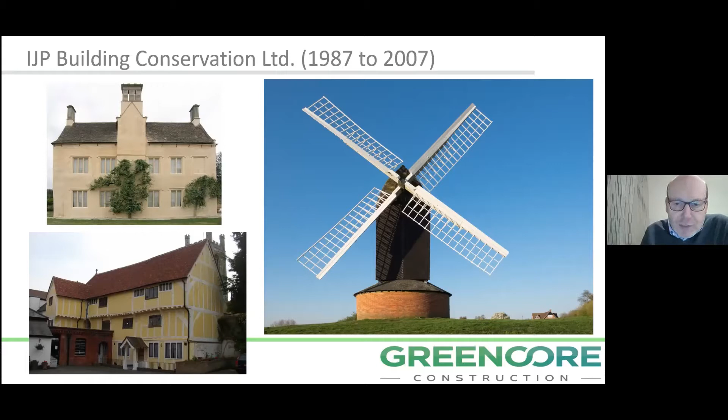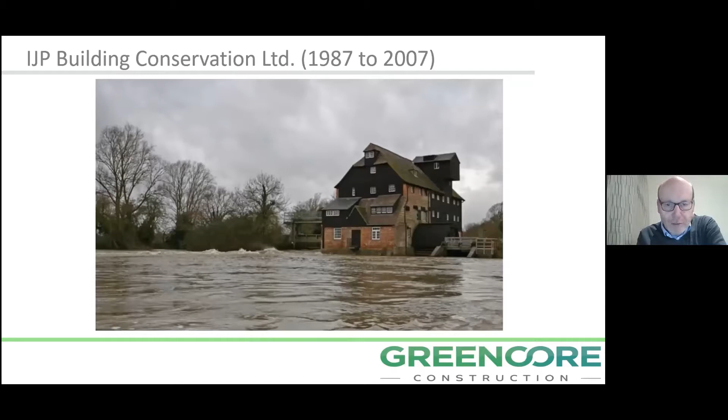And so working on windmills and water mills and having to study the weather, it became very obvious that we were seeing more and more extreme weather happening more frequently. And it's actually, as you probably know, quite subtle, because the differences in freak events are not that great. There's always been something similar in the past, but it's the frequency with which we're beginning to see these freak events happening, and also the fact that we're breaking records on a more and more frequent basis now. So by the early 2000s, I was beginning to think about climate change and the impact that building particularly was having on the climate.

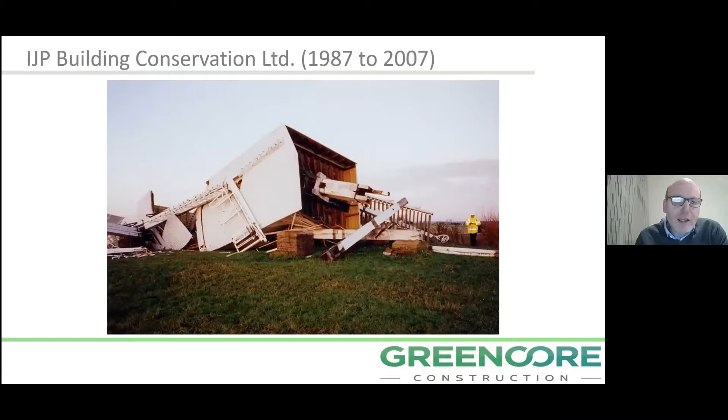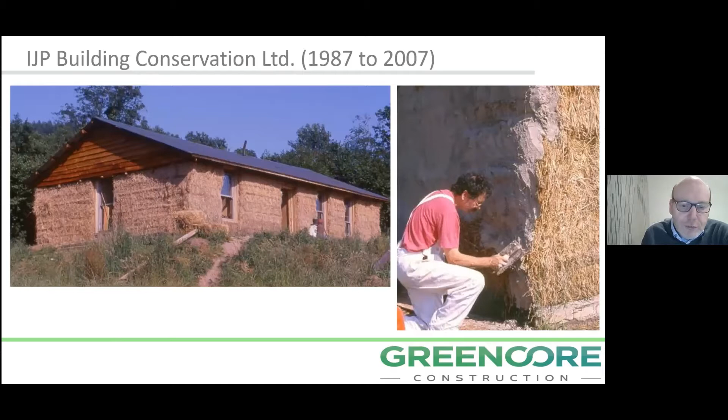But also this was one of my early introductions to using natural materials and getting immersed in eco buildings. And seeing that and the climate change that we were experiencing working on mills led me to believe that some of the things that we used in the historic building sector had a role in new buildings. And so, first of all, we set up a company called Lime Technology in 2002, which was to bring lime mortars, plasters and renders into the new build sector.

And the reason for doing that is mainly that lime mortar is strong enough to stick bricks together, but it's weak enough that you can get the bricks apart at the end of the building's life. So if you build with cement mortar, really that brick only has one life, and that can be as short as 30 years in a modern building.

Whereas if you build with lime mortar, you can get the bricks apart and you can use those bricks again and again, and a brick might have a life of a few thousand years. It could be used many times. And so we developed a way of using lime mortar ready mixed in silos for large scale projects.

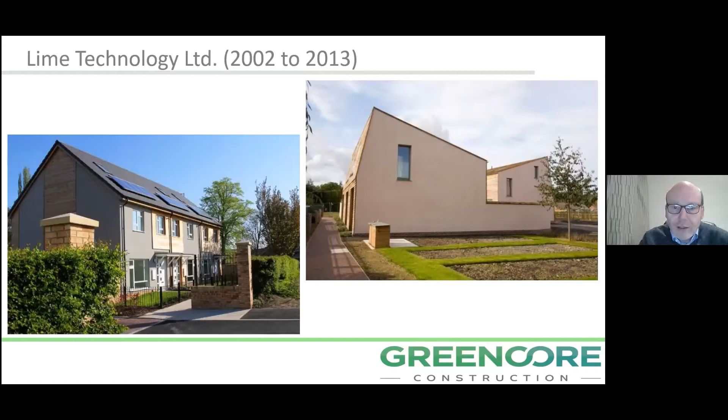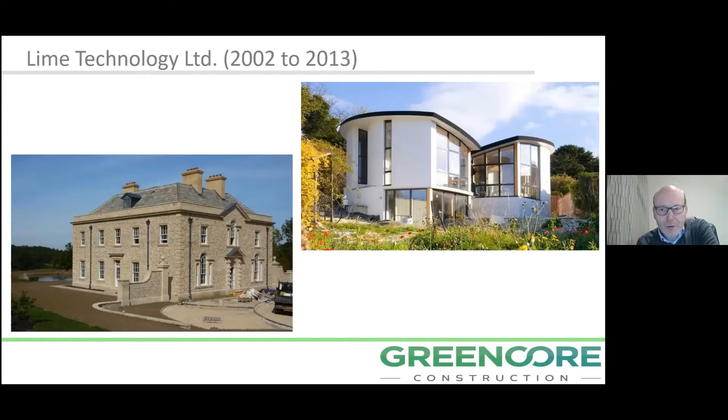And over a period of time, we built quite a few hundred houses of various different shapes and sizes, and we were really involved in supplying the materials and the technical support to people. Some of these houses were very traditional looking, some of them were very modern looking. And we also did quite a few non-domestic buildings.

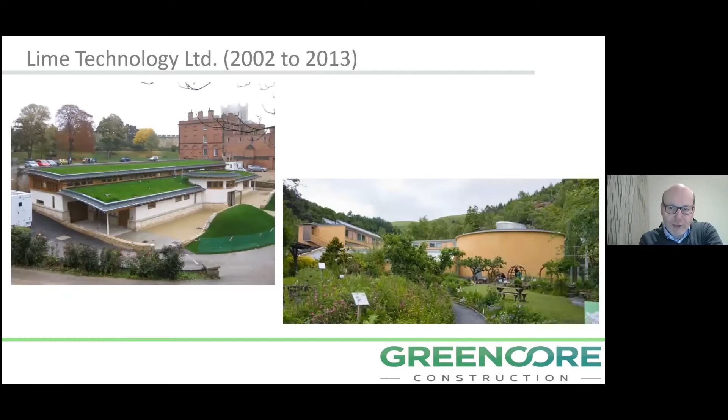The one on the left here is the Heritage Skills Centre at Lincoln Castle, and the one on the right is at the Centre for Alternative Technology in Machynlleth, and it's the WISE building, which is the Wales Institute of Sustainable Education. So it's a sort of mini university complex.

And then in 2013, I left Lime Technology to set up Greencore Construction, and that really meant we had the opportunity to start to not just supply materials and technical guidance, but to actually get involved in building whole houses and building whole developments from scratch.

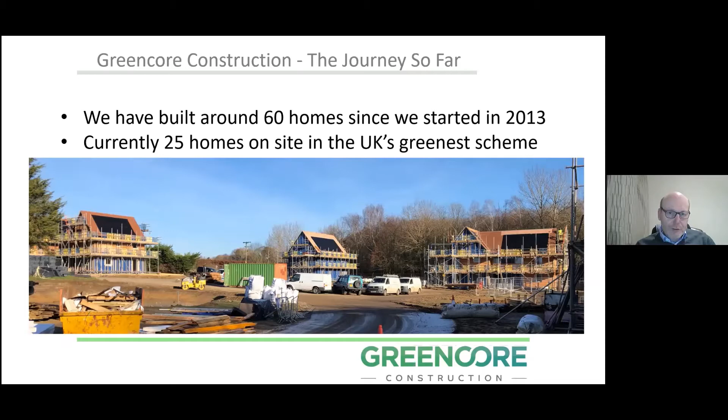And so since we set up Greencore, we've built about 60 houses, and some of you will have seen the project at Springfield Meadows, which is 25 houses, which we think at the moment is the greenest residential scheme in the country, although we'd like other people to exceed it and prove us wrong relatively soon. And all of this really links back to the fact that we're looking for ways that we can help reduce the carbon impact of building, and therefore mitigate the worst effects of climate change.

So the Paris COP conference agreed this target of keeping maximum temperature rise below 2 degrees and preferably 1.5 degrees. And we know that the IPCC reports tell us that if we're going to stand a chance of keeping within the 1.5 degree rise, we've got to be halving our CO2 emissions by 2030. And we're already at about a 1 degree rise, and we're beginning to see the consequences in more and more of those extreme weather events I was talking about.

We've seen temperatures increasing. The hottest day recorded in England, only a couple of weeks ago we saw the hottest New Year's Eve and the hottest New Year's Day on record, didn't we? We've seen wildfires in Australia and the west coast of America. We've seen flash floods all over the world.

And really, I think all of this is summed up by this great quote from David Attenborough that what we do in the next 10 years will profoundly impact the next few thousand. So we've got to be at least halving our CO2 emissions in the next 10 years. And if we don't, it will have a profound impact on what happens for the next few thousand years.

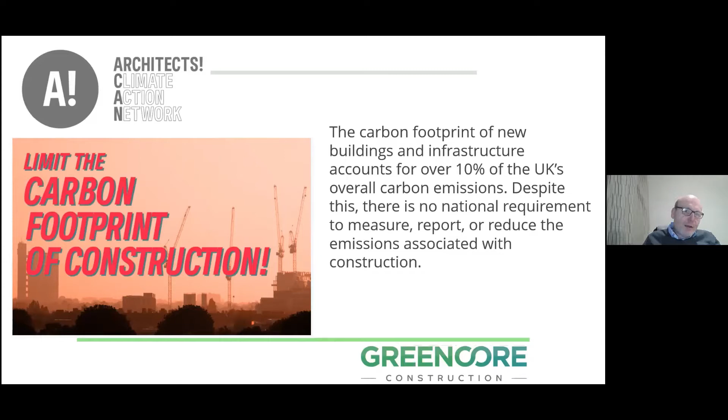Now, we think that the elephant in the room is this thing called embodied carbon, which I'll explain as we go along. Embodied carbon, according to the Architects Climate Action Network, is responsible for about 10% of all the UK's CO2 emissions. That's the carbon footprint that comes from manufacturing all of the construction materials, transporting them, and assembling them on site into buildings and infrastructure. So 10% of the UK's CO2 emissions come from embodied carbon. And despite this, there's no national requirement to measure it, report it, or reduce it. So this all goes below the radar, which is why I refer to it as the elephant in the room.

If we think about it in terms of an average new house, I'm talking about a house that is 100 square meters of gross internal area. The reason I've picked that figure is it's a nice round figure, and it is pretty close to the UK average house size. So all of the emissions from the production, transport and assembly of materials on site to build a house, the average new house is responsible for somewhere in the region of 50 to 60 tons of CO2 or CO2 equivalent emissions at the construction stage. And that's what's known as its carbon footprint.

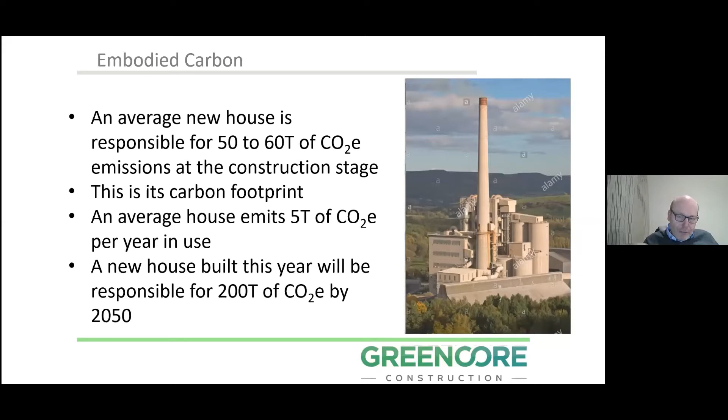And then an average new house in use with an average family in it will emit about 5 tons of CO2 a year. So that means a new house that we build today, by the time we get to 2050, will have emitted about 200 tons of CO2. So in an environment where we're heading to zero carbon for 2050, it seems wrong to me that we've still got houses being built that are contributing to the problem. We need houses that at worst are not contributing to the problem, and at best are actually helping to reduce that problem. So this 200 ton figure per house, just bear that in mind.

Embodied carbon is one of those things that is not really well measured or reported, as we said. So different people that are reporting on it have wildly different figures. If you go to Taylor Wimpey's 2020 sustainability review, they don't actually measure the embodied carbon. What they do report on is this line here, which is emissions per 100 square meter completed house based on scope 1, 2 and 3 emissions, which, although not absolutely identical to embodied carbon, is incredibly similar. And they come up with a figure down in this bottom corner of 209.8 tons. That's purely at the construction stage.

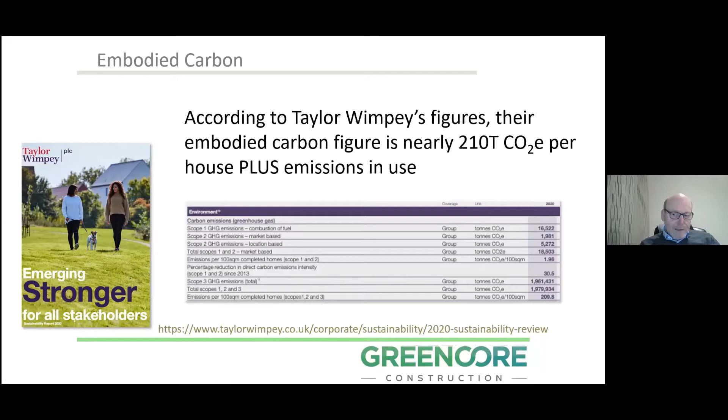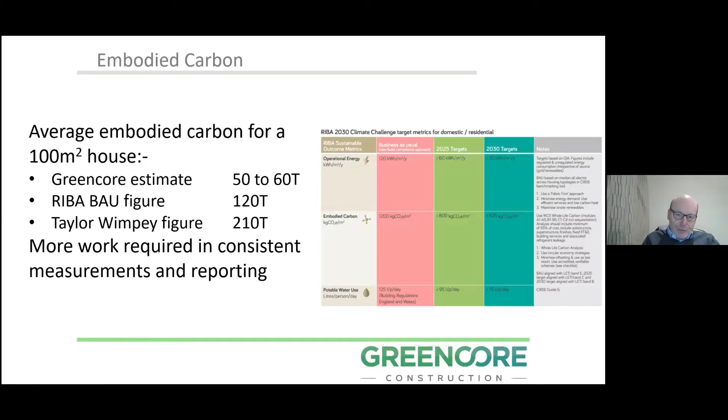So Taylor Wimpey's figures appear to be much higher than the average figures I've reported on. If you go to this table here, which is from the RIBA 2030 Climate Challenge targets, they talk about embodied carbon in the business as usual category of being 1,200 kilos per square meter. So you've got some wildly different figures. According to industry estimates that we use, it's 50 to 60 tons per average house. The RIBA business as usual figures are 120 tons, and Taylor Wimpey's figure is 210 tons. So we clearly need a lot more work in consistent measurement and reporting against embodied carbon, because it's so important.

Back to David Attenborough's quote, what we do in the next 10 years will profoundly impact the next few thousand. Well, there are pretty close to 100,000 new houses planned for Oxfordshire in the next 10 years. And if the figures that I was talking about of 200 tons per house in construction and operation over the next 30 years are correct, we will squander 80% of Oxfordshire's carbon budget just on building unsustainable houses. And worse than that, those houses will probably need to be upgraded in the relatively near future. If Taylor Wimpey's figures are right, then we will actually use 100% of Oxfordshire's carbon budget by about 2029. And remember, that budget isn't just for construction, that's for all sectors, industry, agriculture, transport, and everything as well. So clearly we have got a big problem. We cannot carry on as business as usual.

We also have a problem with the way people think about zero carbon. When most people are talking about zero carbon, things like building regulations, politicians, what they're referring to is the operational emissions, the emissions that come from the heating, the hot water, the lighting, and the way people live in houses. They're not talking about the embodied carbon. And we really need to tackle both of these things, the embodied carbon as well as the operational emissions.

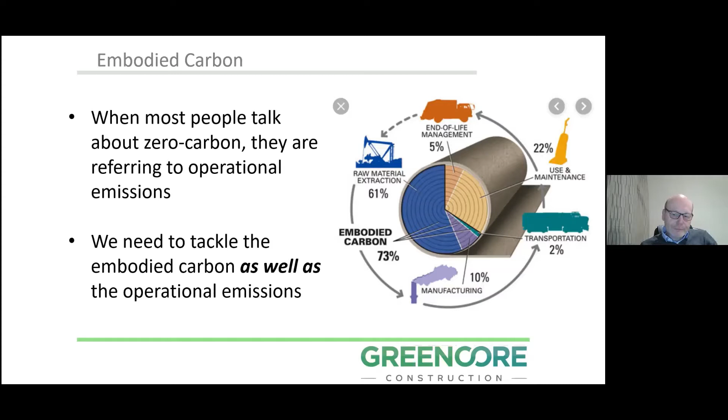So there are two main ways that we can tackle the embodied carbon in buildings. We either need to be using renewable energy or green energy, things like green hydrogen or renewable electricity for the production and transport of those materials, or we need to be using bio-based materials that have grown, and as they've grown, they have captured CO2 from the atmosphere. So we'll talk a little bit more about that in a second.

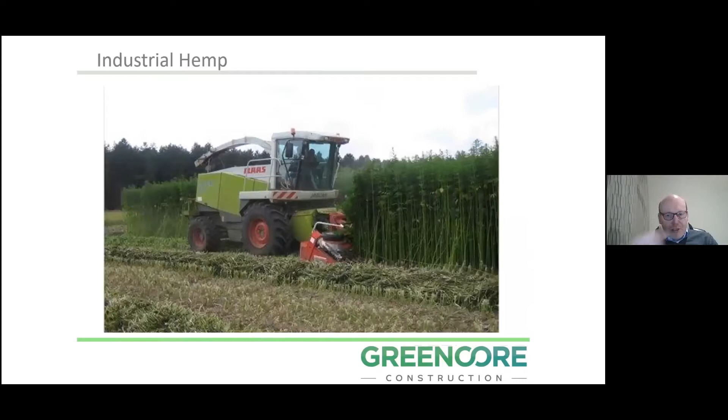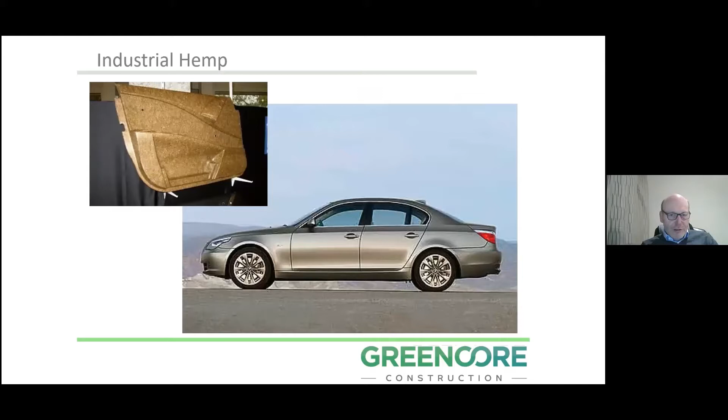We use not just timber, but we also use hemp. And I think a lot of people, when they think about hemp, they probably associate it with its cousin, which is marijuana, and think about hippies and drugs and that sort of thing. But actually hemp is a serious industrial crop that's grown on a large scale across Europe and goes into a wide variety of different industries. The automotive industry has been using hemp in its interiors for nearly 20 years now, and particularly BMW has been using hemp in all of its 3 Series and 5 Series interior doors and dashboards and roof linings and things.

Back in 2008, Lotus built an experimental concept car where the whole body shell was built out of hemp. All the interior, the exterior body panels, all of the seats was entirely hemp. And it all sounds a bit wacky and groundbreaking, but actually Henry Ford was doing this in the 1940s. Henry Ford was a great advocate of hemp, and if the Americans hadn't banned the growing of hemp under some misguided association with marijuana, we would probably see the whole automotive industry building everything out of hemp by now. So hemp is not an odd material. It's a very serious industrial material that is grown.

And the reason we are looking to use bio-based materials is that as they grow, they absorb carbon dioxide, and through photosynthesis, they turn that carbon dioxide into cellulose. So the carbon becomes locked up in the cellulose, the oxygen goes back to the atmosphere, and that's how we're all able to breathe, because plants are continually recycling carbon dioxide into oxygen. And if you go through the maths and the chemistry of this, it actually takes 1.8 kilograms of CO2 to make 1 kilogram of cellulose. So every kilogram of a bio-based material we can use in a house, we are locking up more than 1 kilogram of CO2. So the more bio-based materials we can incorporate in buildings, the more carbon we can lock up.

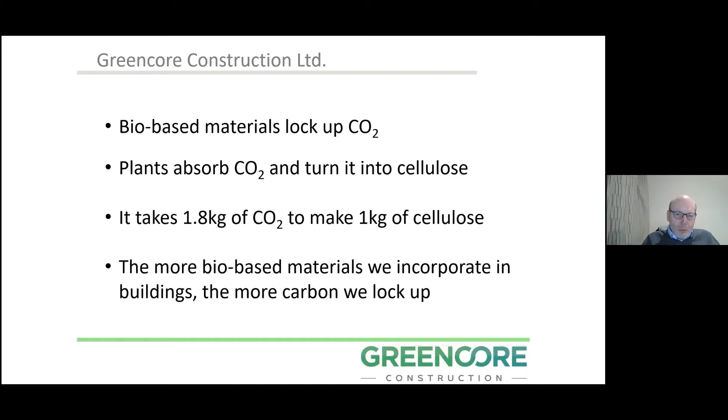And if we do a carbon footprinting exercise, measuring the embodied carbon, there is now some quite detailed guidance produced by the RICS, the Royal Institution of Chartered Surveyors. And what they say is to be able to include the benefits of carbon sequestration, that locked up carbon, you have to make sure that it is coming from sustainably sourced material. So if that's timber, it has to be FSC or PEFC certified. So those are sustainable forestry certifications.

And you have to make sure that any trees that are felled are substituted with a minimum number of the same trees. And we also have to consider what happens to that bio-based material at the end of the life of the building. Is it allowed to rot? And in which case the CO2 is released back into the atmosphere. Is it burnt to release the CO2 back into the atmosphere? So there are a number of things we need to be thinking about here.

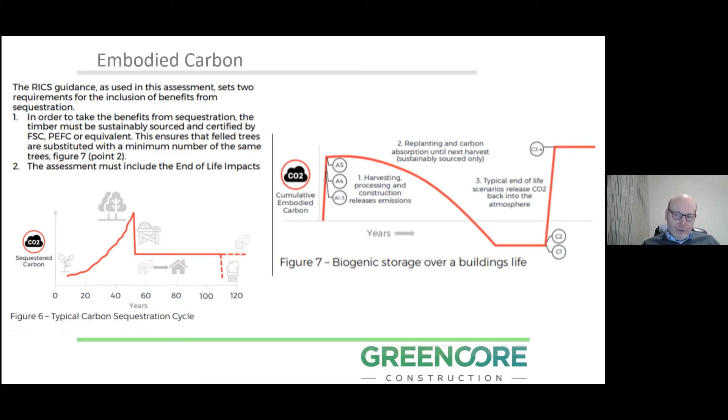So if we look at what this means in terms of embodied carbon, we've recently had an external consultancy practice called WSP do some embodied carbon work for us on a typical house. And what they found was that in the construction stage, we were emitting 360 kilograms of CO2, but we were managing to sequester 700 kilos of CO2 for each square meter of floor area. So the net figure at the construction stage was minus 340 kilograms of CO2.

So there's an organization called LETI, the London Energy Transformation Initiative, and they have a target of getting new houses to minus 100 by 2050. We're already managing to be minus 340. So we know it can be done.

And then if we look at that across the whole life of the building, which includes maintenance and ultimate demolition and some of that carbon getting back into the atmosphere, we're at a figure of minus 278 across the whole life of the building. And we believe that everybody should be measuring and reporting on this so that we can all see how we benchmark against each other and encourage each other to be going further.

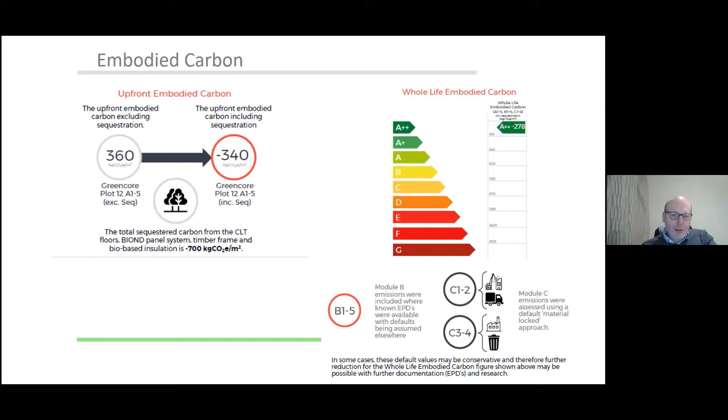So our philosophy is that we should be planting more and more trees for a number of reasons. We should be planting trees to combat deforestation, improve wildlife and biodiversity, but we should also be planting trees as natural carbon capture and storage mechanisms that can then feed into industries like construction. And there was a university research project in Switzerland that calculated that if we planted 1 trillion trees worldwide, we could capture enough CO2 to reverse climate change.

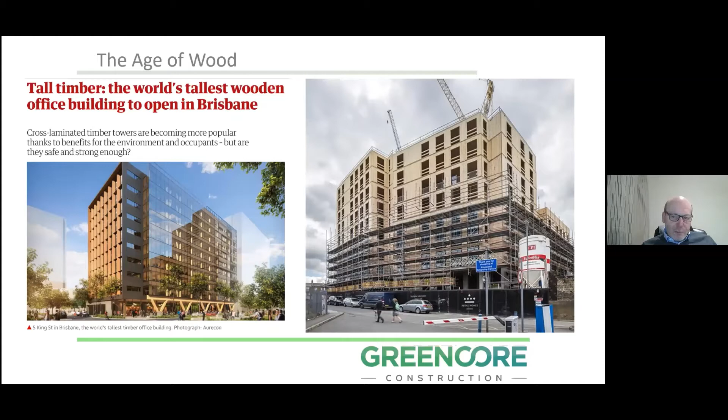Unfortunately, the agenda of building high-rise buildings in timber has taken a setback as a result of the fire at Grenfell. There has been a bit of a knee-jerk reaction against anything flammable in high-rise buildings, but the reality is timber is not a fire risk in high-rise buildings because it's very difficult to set this sort of dense engineered mass timber alight, and even if it does catch light, it burns in a very predictable way that can be planned as part of the design strategy.

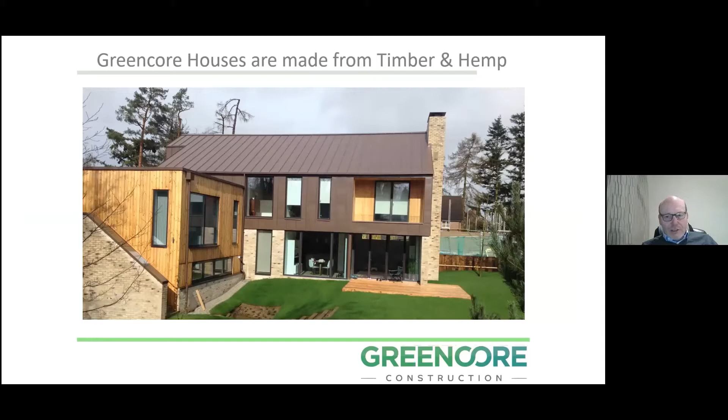At Greencore, we've been building timber houses and houses out of timber and hemp and wood fibre and other natural materials for the whole time since we were set up in 2013. And these houses can take any sort of shape and form. These are examples of houses that we've built. This one's in a conservation area between two listed buildings. These are affordable houses that we built for Sovereign Housing Association.

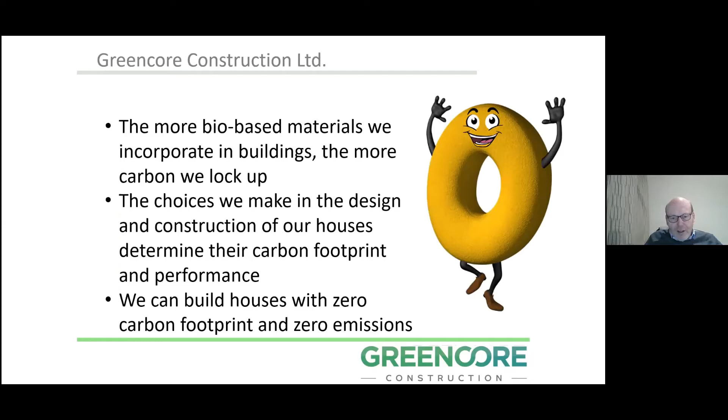And so in very simple terms, it is possible to get to zero carbon. The more bio-based materials we incorporate into the buildings, the more carbon we lock up. So when we design a building, we have a series of choices to make. And those choices are not just about the aesthetics. They impact what the house looks like, how it performs thermally, but also what its carbon footprint is. So if we make the right choices, we can build houses that have zero carbon footprint and are thermally very efficient as well to have zero emissions in use. And this is really what we've been trying to do.

And our latest project at Springfield Meadows set the target of having zero embodied carbon and generating as much energy on each house through the PV panels as the house uses in order to be net zero energy across the year as well. So this is part of phase one. There's 25 houses in total. And phase one was our target to have zero embodied carbon.

But actually, during the process of doing this, we realized that if we know how to get to zero, we actually know how to get to better than zero. You just do more of the same and lock up more carbon. So the second phase is what we refer to as climate positive, where we are locking up more carbon than we're emitting. And so in general, across the scheme, these houses have zero carbon footprint or better.

They're built in accordance with the Passivhaus thermal performance standards so that they need minimum heating. And the other thing to bear in mind is Passivhaus is not just an energy standard, it's about comfort and health as well. So these are very comfortable, healthy buildings. We have calculated the amount of energy the houses should use and put enough solar PV panels on the roof to generate at least that amount of energy each year. So they should be net zero energy in use.

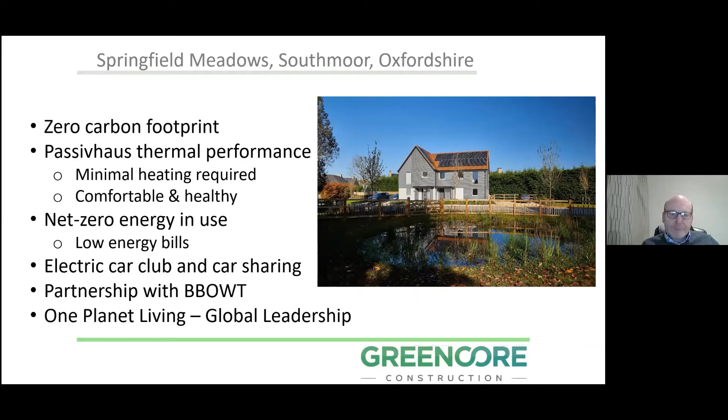It's also the first private residential scheme to be funded by Triodos Bank. Triodos, as some of you will probably know, is probably the only sustainable bank in the world. And they funded affordable housing and renewable energy and things for many years, but they've only recently started to fund private housing, and they insist on it being built to the very highest environmental standards.

So in summary, the secret formula we use is bio-based materials to lock up the carbon, the Passivhaus performance standards, so very high levels of insulation, designing out thermal bridges, making the buildings very airtight, having triple glazed timber windows and a ventilation system that's got heat recovery built into it, so that we're not losing all the warm air when we remove the stale air from the building, because it's being used to heat the fresh air coming in.

And then the houses don't have any fossil fuels, so everything is electric, the heating, the hot water, the cooking, and then they've got PV panels to generate that energy. And in a number of the houses, they've also got batteries to store that energy.

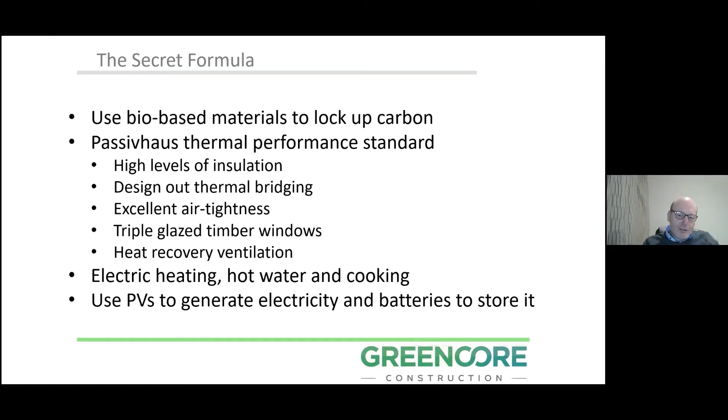A lot of mainstream construction companies and house builders say that it is not viable to build zero carbon houses because they say it's too expensive. So we've looked into what the value chain is. When you buy a new house, how much of that is actually from the construction and how much is from all the other bits. And it turns out that somewhere between 40 and 45% of the cost of a new house is actually its construction cost.

There's a lot of people skimming off bits, whether it's the landowner making money by getting planning consent, or the local authority charging Section 106 fees, or the profit, or the finance. So there are lots of other places that we can squeeze money out of the system. So we don't actually think it costs more to build zero carbon houses. You just have to look at things differently. But even if it did cost a little bit more, there are other ways to mitigate that cost in order to look at the whole life cost of the building.

During 2019, you were probably all aware that there were the school strikes going on, and I'm not a political type of person, but I found myself getting involved and marching through Oxford with a banner calling for zero carbon homes now. And I think the world's really started to wake up to environmental issues, and the arguments and the agenda changed. And this was the time when we realized that if we knew how to get to zero carbon, we knew how to get to better than zero carbon.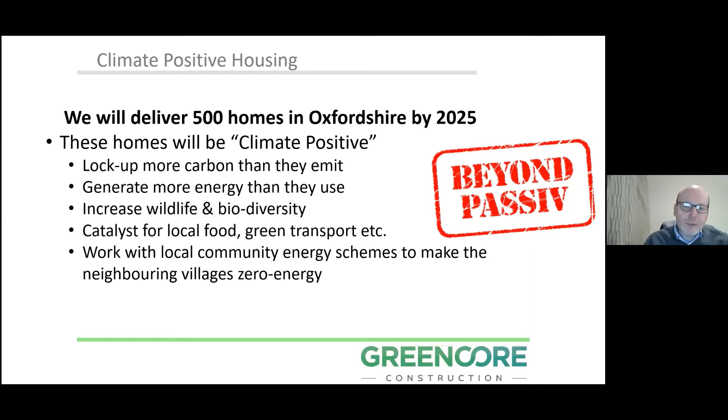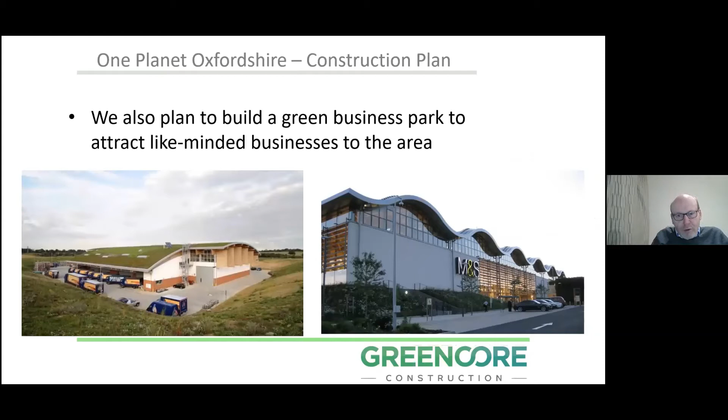And we're also looking for an opportunity to build a green business park in Oxfordshire so that we can attract other like-minded eco-businesses, make Oxfordshire an innovation zone for zero carbon housing, zero carbon building, and lots of other things will follow on from that as well. So I think it was Abraham Lincoln that said that the best way to predict the future is to create it, and that's really our job at Greencore.

So thank you very much for patiently sitting through all of that. I hope that didn't go on too long. I'm going to stop sharing so that we can start to take some questions. Right, Ian, thank you very much for that talk. Very, very interesting. Thanks, Karen. Right, let's have a look at, is anybody ready to ask a question? You can either put your hand up and we'll attempt to spot you, or put up a virtual hand. Roz, you've got a virtual hand up. Would you like to ask?

Yeah, hi. Thank you very much, Ian. That was really interesting. But I was a little bit confused whether you were really promoting wooden houses or hemp houses. And you mentioned bamboo very briefly, but you didn't really talk about that. Where does that sort of fit in? Right. Okay. So at the moment, structurally, we're using timber. So the main structure is timber. The insulation is a combination of hemp and wood fibre.

And things like bamboo lend themselves to particular fittings, so things like flooring, kitchen units, and maybe doors in due course. At the moment, there's a relatively limited range of things that you can get made out of bamboo, and obviously bamboo doesn't grow in this country, so you have to look at the whole chain of custody and environmental impact. But I think we'll see more and more bamboo products come forward, and we'll be looking to see where we can incorporate them further, because they have a shorter rotation of carbon within them than timber.

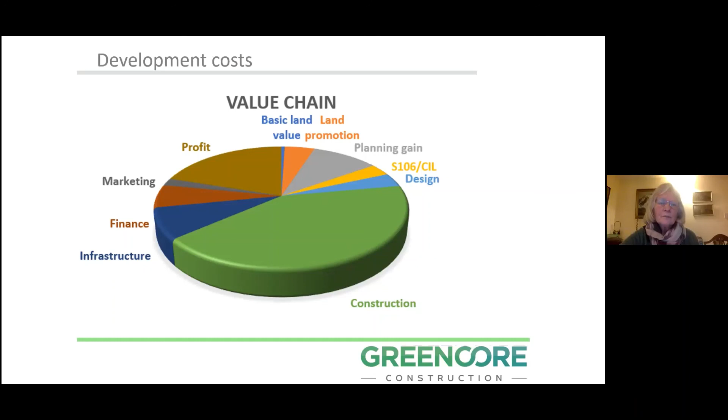So this is also based on a scheme that includes affordable housing and open market housing. If you were just looking at the affordable housing or just the open market housing, the ratios would be different. This is blended across 35% affordable. Yes, which is what we have at the Vale. Yes. Okay.

So could you see that working out in our flat packs? I'm thinking of figures that are way below, we're talking about 150,000 for a flat pack house, which you can get in America and in Germany, but I just don't know whether you can get that here, looking at your pie chart. I think it would, yes. Unfortunately, it isn't just the 150,000. There are normally costs associated with infrastructure and getting roads and drains and services to the houses as well.

But certainly being able to achieve houses that are half the price of open market houses is very achievable. Well, that's interesting. When we sell a house to a housing association, in general, it's about half the cost it would be if we were selling it on the open market, and that still just about works out viably. Well, that's very interesting. Thank you. That's okay. Thank you.